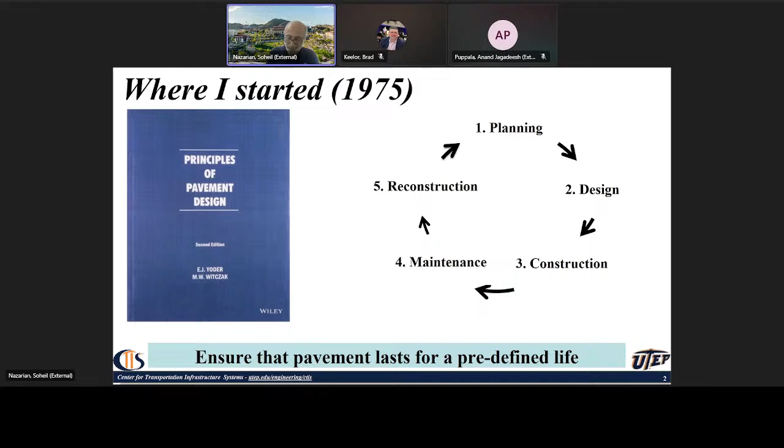In the 1970s, I started college in 1975, that's when the actual pavement design came out, the empirical ones. Since then there were revisions, and now we are lucky enough to have Pavement ME, which is quite an achievement. I guess Professor Witczak, that I started with, had a big hand in developing this.

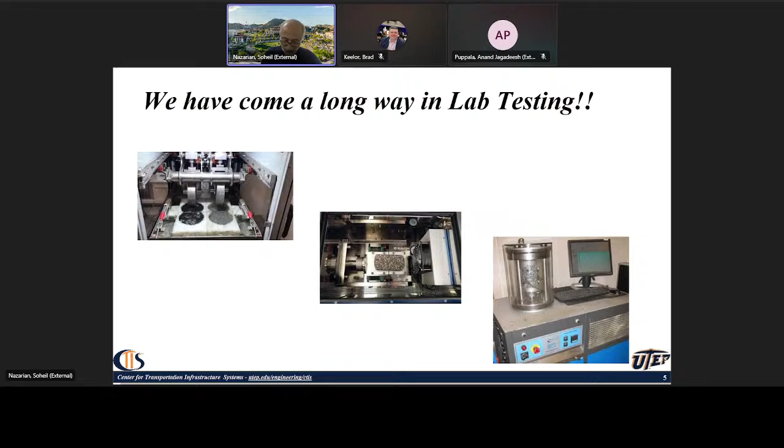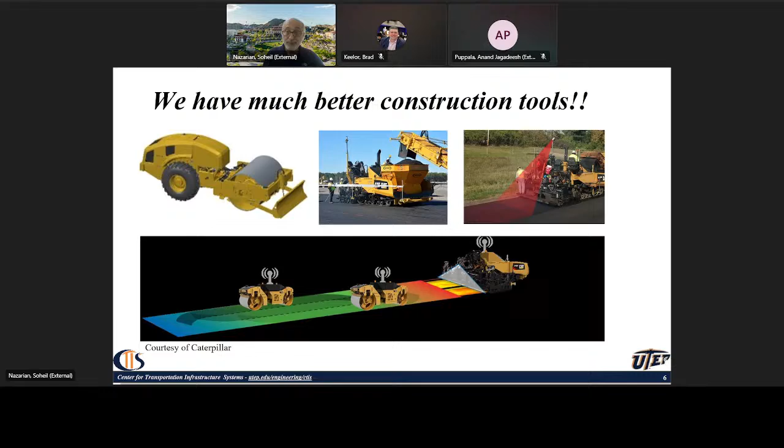In terms of lab testing, we have gone from Marshall pills and stability to a bunch of sophisticated fundamental and index tests. Construction tools have come a long, long way. Now we have all computer control, autonomous systems, and a lot of improvements to get better quality construction. And of course the last one is non-destructive testing. I'm old enough to have used the Benkelman beam. It was fun, but you don't want to do it forever.

Now we have traffic speed deflection devices that can go 60 miles an hour and collect the data for you. So everything has improved significantly.

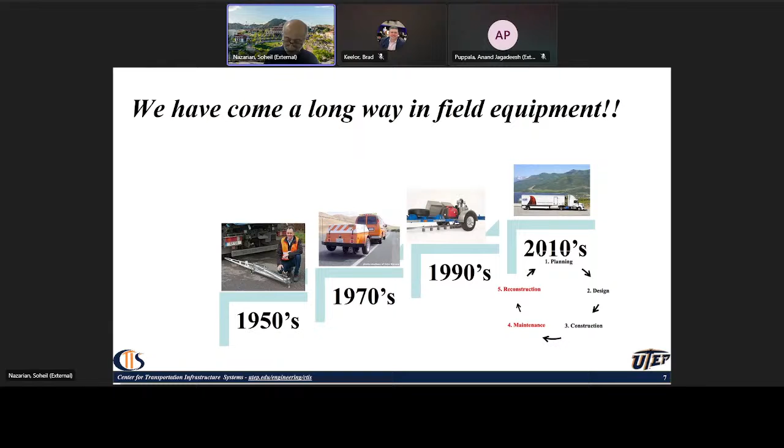But one thing that has not changed is the way we are dealing with construction, maintenance and rehabilitation. So there is a mismatch between these three areas. We design based on modulus, we construct based on density, and then we just basically look at the distress and roughness for decisions on maintenance and rehabilitation.

So let's look at the goal one more time. I just took the one that I learned from Yoder and Witczak and changed it a little bit. I want to ensure in a practical manner that the pavement lasts for a predefined life, but uniformly. So there are two items I'm going to talk about, and it's hard for the faculty, but I do. One is practicality, the other one is uniformity.

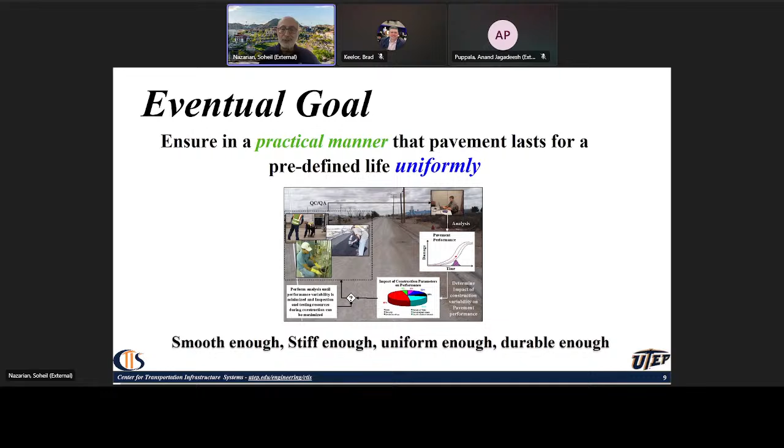So we want a smooth road, stiff enough, uniform enough, and durable. So this is the ideal steps that we can do, and then let's look at it, and we can then relax some of it.

We want to select the appropriate design algorithm. There are different levels, different sophistication of algorithm. We need to choose the right one for us.

We need to select the suitable materials for durability. I'm going to comment on that. Durability is important, but it doesn't come into the design.

We need to measure the input parameters that are compatible with the design algorithms. Sometimes we just keep using the default and not knowing the property.

We want a quality management program with target values that, you know, we can make sure that we are measuring all the parameters that are important and we are monitoring it.

Process control, we need process control to maximize uniformity. And then we need an acceptance process based on the stiffness, because we are designing based on it, stiffness.

And finally, monitoring the final product. One thing that I love to see, as a person who all his life has been doing non-destructive testing, is to have a test before you open it to traffic, because detecting changes is much easier than looking at absolute numbers and making decisions.

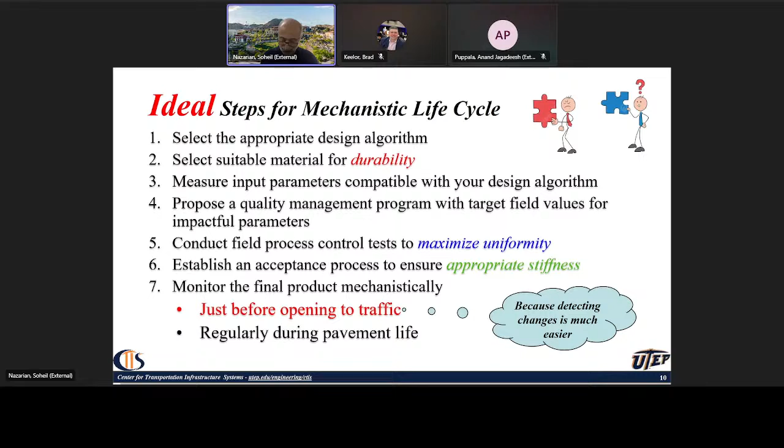So that was the ideal. I'm not naive. We have institutional issues. First of all, there's a manpower limitation. Everybody knows that issue comes up. Budget limitations, we're always dealing with that.

One thing I want to bring to your attention: if you are working for the aerospace industry, 85% of the cost is quality control. When we do highway construction, we spend less than 2% on quality control. So we don't want 85%, but maybe a little bit more than 2 would be good.

And then, of course, risk assessment. What's the risk of a failure in this time if we have a premature failure and the rehabilitation isn't working? What are the issues with that?

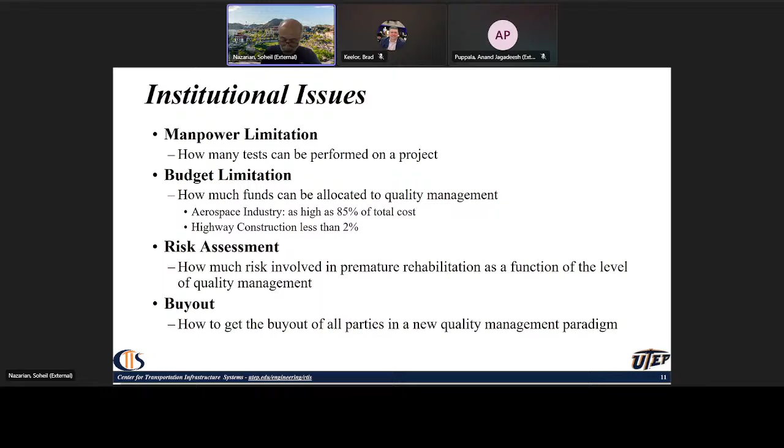And of course, we need a buy-in. We need to make sure that the owners know what we're doing, the contractors, and all the designers and people who are interested in between.

So I just scratched out the ideal and I put in a practical process, and hopefully that would work. What we're trying to do, first of all, we have to understand we want to minimize the life cycle cost, not the construction cost, as much as possible. And then there are 4 important parameters that are interrelated.

First, more important, more critical projects need more detail. Analytical modeling effort, we have to choose it again in a way that is pragmatic so that we can get the parameters that are in the model. We need laboratory testing to support the parameters that you need for the model, and we need field testing for quality control and monitoring. These have to be balanced, all four of them, to a level to achieve that life cycle cost.

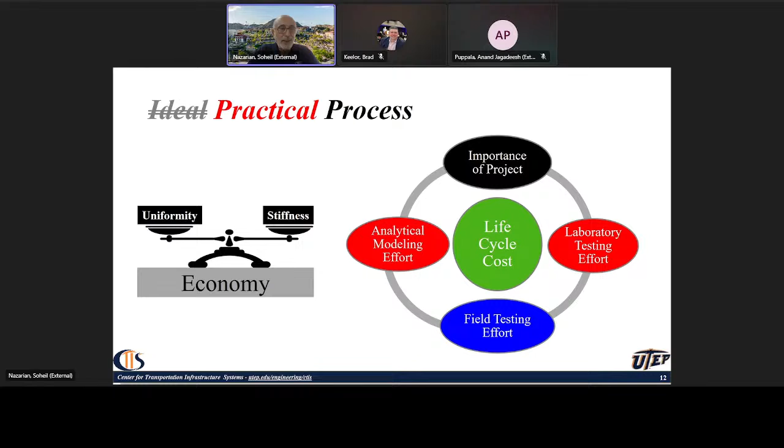So to summarize it, we have the economy as a foundation - I guess this is geotech, I can use that term - and then we are trying to balance uniformity and stiffness in a manner that gets us a durable pavement.

So these are some of the things that we have to consider. So I'd like to be positive - let's scratch the mismatch and start talking about the pathway to compatibility. These are my dreams to get there. And let's start with the design.

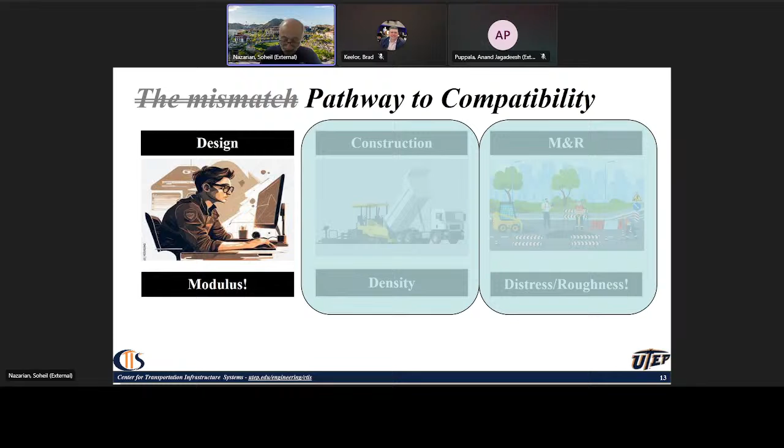So the first thing, one of the issues is that we are very loose in the definition of stress and the modulus. There are different methods, different ways, and different states that we can get the modulus, and we have to be very careful how we use it. So I'm showing you some of the parameters that are important: state of stress, temperature, moisture, frequency, and on and on. There are parameters that impact your modulus for the same material under the same condition.

Now the measurement, it can be linear elastic modulus. It can be seismic linear, which gives you the linear elastic modulus.

I like that because there is no transfer function between the field and the lab. But nevertheless, if you want a representative value, you can use something representative of truck or a falling weight deflectometer. You're going to get a different modulus, which is the slope of the blue line. And then when you go to the lab, you're going to get an even different modulus because that will be the slope of the green line. So you see that we have to be careful, and these moduli are interrelated, but we have to be careful which ones we are using.

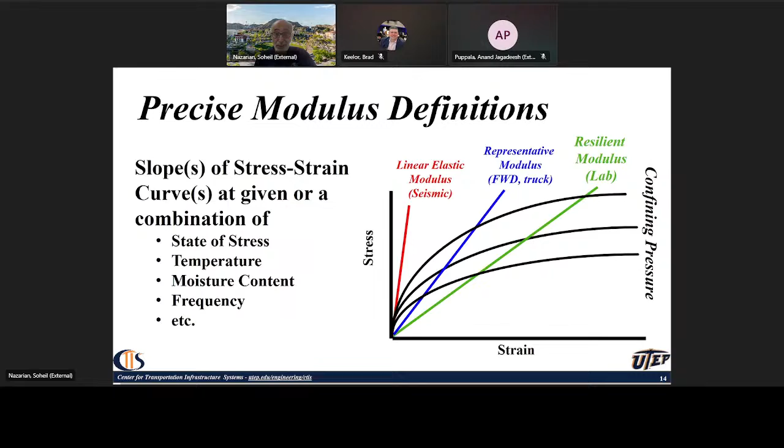I give you two examples here, one for concrete, because it's probably the easiest material to test. We normally run static modulus tests, and also seismic modulus, and there are a bunch of different mixes here. You see that the static modulus is 72% of the seismic modulus, so we can replace one with the other for that purpose.

The other one I want to show you is more difficult, for instance, granular soils. We run resilient modulus, and we can run seismic modulus before the resilient modulus. You see here, the relationship between the two is roughly 55% because of the strain and stress condition. But when I'm defining the modulus on the y-axis, for the resilient modulus, I'm identifying at what confining pressure and at what axial stress. Because if we just start mixing and matching, the data would be random. But at a given state of stress, you can relate them together.

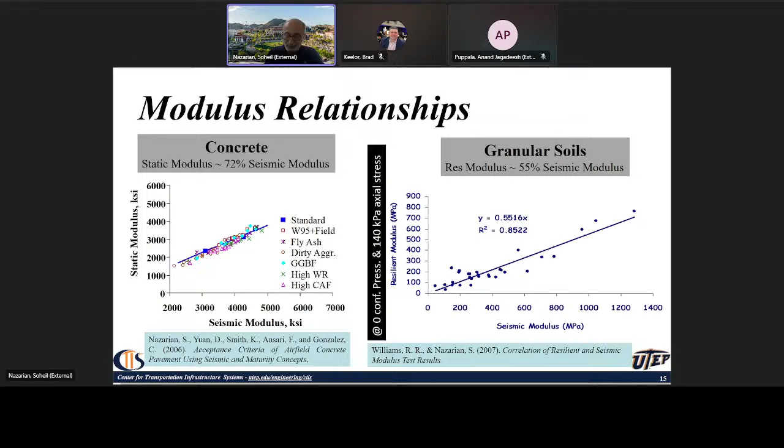So let's look at the design approaches. I would start with the most desirable to the least desirable. The most desirable is mechanistic. Then mechanistic empirical, catalog design, and then, of course, empirical.

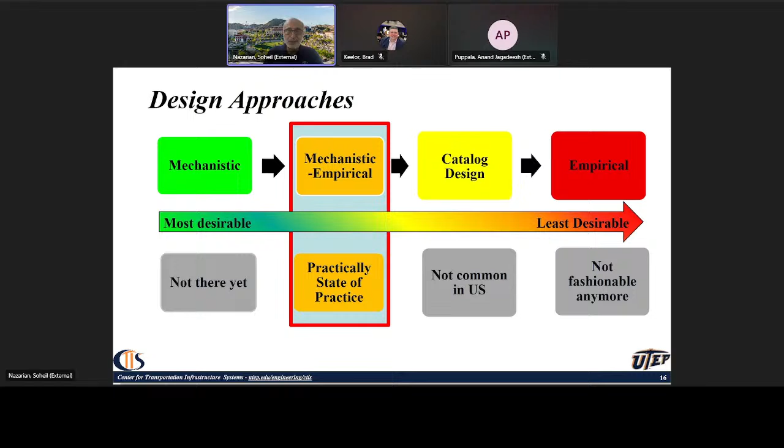Mechanistic, we are not there, and it would be a while before we get there. Mechanistic empirical is essentially the practical state of the practice now. Catalog design, we don't do much in the US. The only time we do catalog design the hard way is when we do not change the defaults on the design parameters of the program we are using. And then, of course, empirical is not very fashionable. Very few people are using it. So my focus would be on mechanistic empirical from now on.

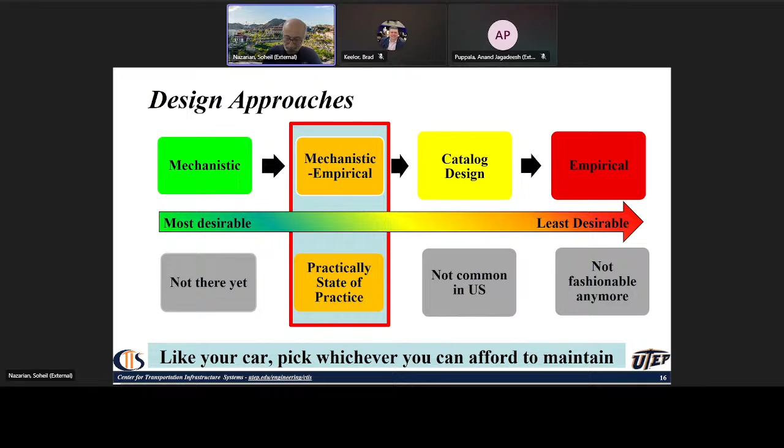So what mechanistic empirical, and how much sophistication, just depends, like the way you buy your car. You don't always go and buy a Porsche if you are not willing to change the tires every 3 months and pay $3,000. So just depending on how much you can afford to get the parameters realistically, you need to decide on that.

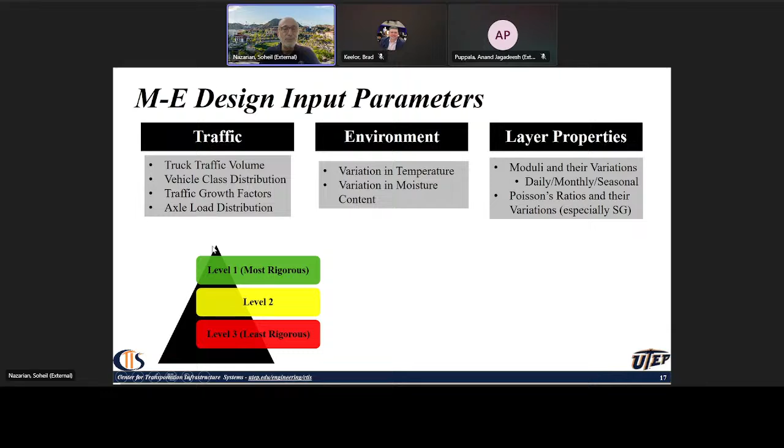So let's look at the design parameters. There are 3 general areas: traffic, environment, and layer properties. These are the 3 input parameters, and then the details around it. And then these three we can have at different levels. Usually most programs have level 1, the most rigorous, where we measure everything that we put into the program. Level 2 is somewhere intermediate, and level 3 is the least rigorous of all.

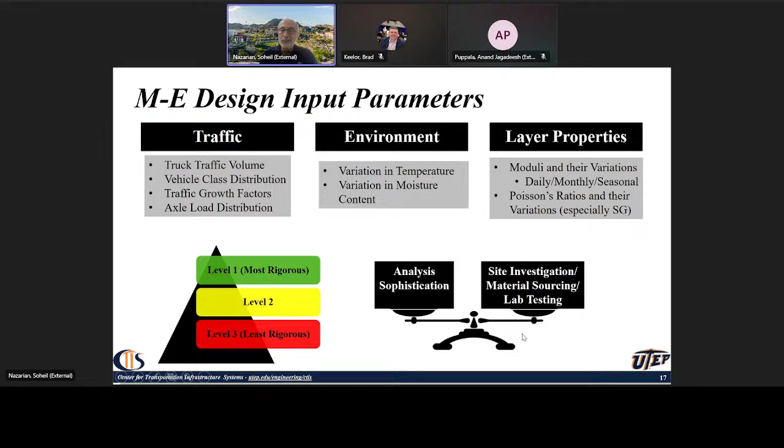Basically what I'm suggesting here is that we have a need to balance the analysis sophistication with how much we are willing to do site investigation to define the site, how easy it is to source material, not design based on a fictitious material but a material that we know, and how much lab testing we would like to do. So if you go to level 1, make sure that you measure it all.

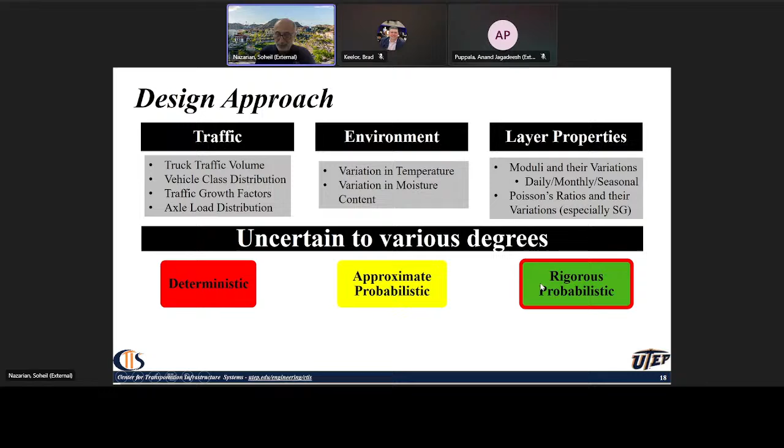The other issue that comes up is uncertainty, because material uncertainty is a significant issue that we have to deal with. Traffic is the most uncertain of all, because as they say, if you build it, they will come and build a bunch of homes and stores and factories. Environment, just by nature, is variable, and then layer properties, of course, uniformity is something we need to understand. So you can go deterministic, approximate probabilistic, or rigorous probabilistic. And if we go rigorous, then we are talking about time. I prefer that, but we have to see how we can do that.

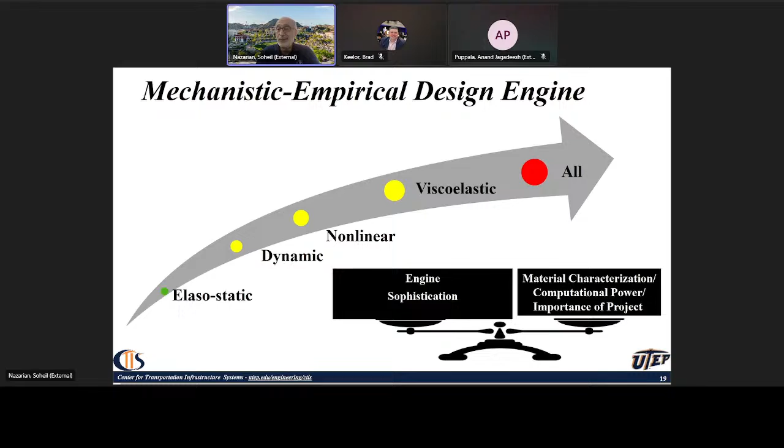I would like to talk a little bit about site investigation. This is something we have to consider, because a lot of the time the problems we have with the design is that we don't have a good grasp of the section. Traditionally, we go every tenth of a mile or every 500 feet and just drill a hole and see what we have, and then we simplify the cross section.

I think we need to shy away from that, and something I call the insurance against change orders is to basically start using some of the much simpler, rudimentary ways of looking at the variability, and drill based on what these tests tell you. Put the boreholes closer where there are anomalies. When it's uniform, just go further apart.

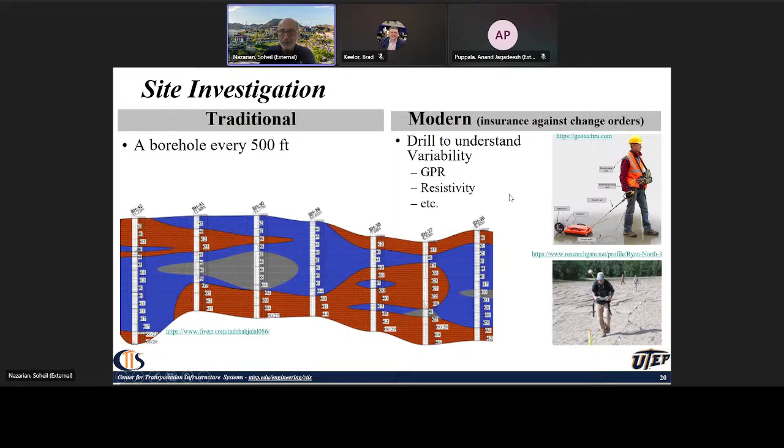Two examples: one is GPR, and you don't need sophisticated analysis, you're just looking for the anomalies. And the other one is resistivity. You see this gentleman has a string of sensors, and it just basically walks and collects the data to look at anomalies. If we do it based on that, I think we can improve the reliability of the design.

Now, I said durability. The problem is that we cannot design for durability. It's a holistic thing, something that comes with experience. For instance, we know that if there are significant layer mismatches between two adjacent layers, you have a problem.

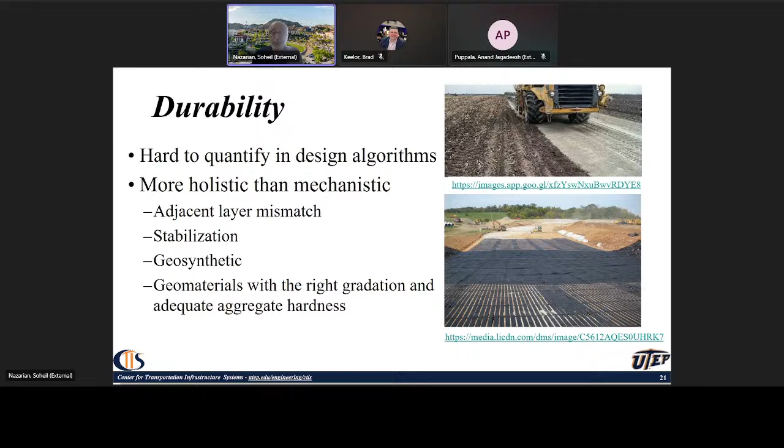Stabilization, we know that it's going to increase the life. Geosynthetics can separate and basically strengthen so that we can have a longer life. And of course, geomaterials with the right gradation and adequate hardness, that's something that affects durability. These are the holistic things we need to consider before we go to the design.

Okay, enough said about the design. Let's go to the next one and start talking about construction. Construction, we just basically do based on density. I would like to see if we can go from that to modulus, because we design for modulus. We are the only industry that doesn't check what we design for.

So instead of traditional QA/QC, I would like to talk about performance management. This is terminology I stole from John Siekmeier from Minnesota Department of Transportation. Essentially, we want to check both material quality and workmanship. I think in one of the ASCE reports, they say that 80% of the problems we have are with workmanship, 20% with material quality. If you look at the QA/QC programs we usually have, we check material quality and pay less attention to workmanship.

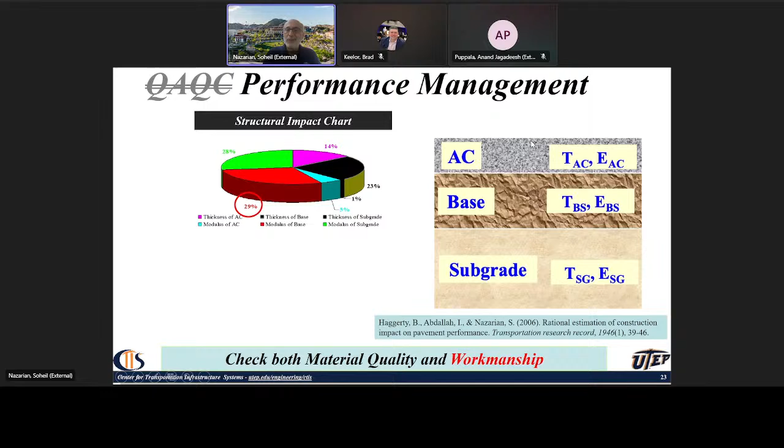So what do I mean by performance management? Let's say you have a typical flexible pavement, three layers. The first thing I want to introduce is a structural impact factor. That essentially tells you which parameter, which thickness or the modulus of which layer, is most significant for your design. If it's a thin pavement and I do the impact chart...

You see that the two parameters that are most important are the modulus of base and subgrade. Those are the foundation layers. And for geotechnical engineers, that's good. The problem is that most of the effort in quality control goes with the AC, even though it's thin, and less with the layers that would ensure durability.

The other parameter I would like to introduce is material impact. Which parameter in each one of these is impacting the performance? For instance, if you stabilize it, is it the percentage cement you have to worry about, or the stiffness or hardness, whatever it is, moisture, whatever it is, and then you do process control based on that.

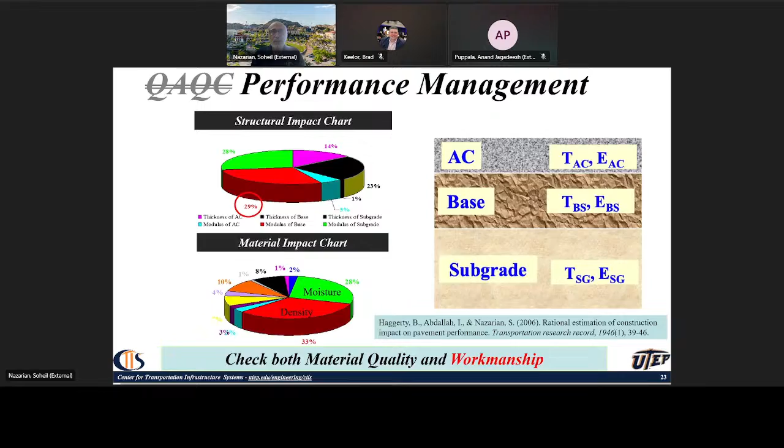So if you're doing performance management instead of QA/QC, there's a pre-construction phase, which is part of the design, and on that one you decide on the parameters that are important, the layers that are important, and the properties that are important. Then you can get the sampling rate based on the variability that you can tolerate. This is just basically part of the design, done in an intelligent manner and optimized from the beginning.

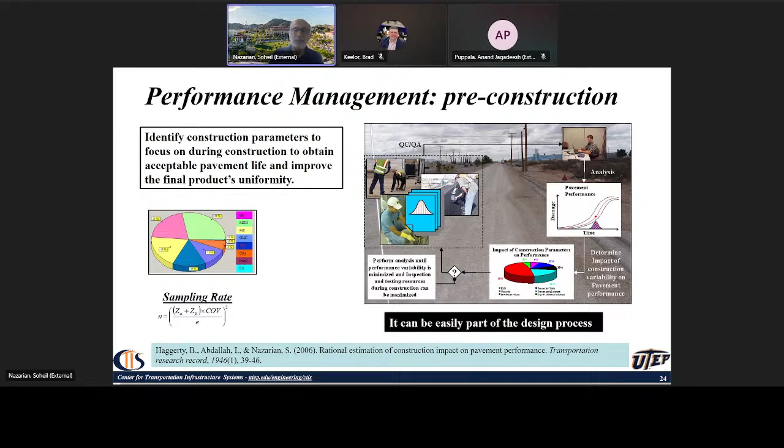I wish I had a day to talk about that. Intelligent construction technology has come a long way, where we can monitor the process in real time and learn from it to improve construction and make it more uniform. I highly encourage contractors, especially, to look into it for the competitive edge.

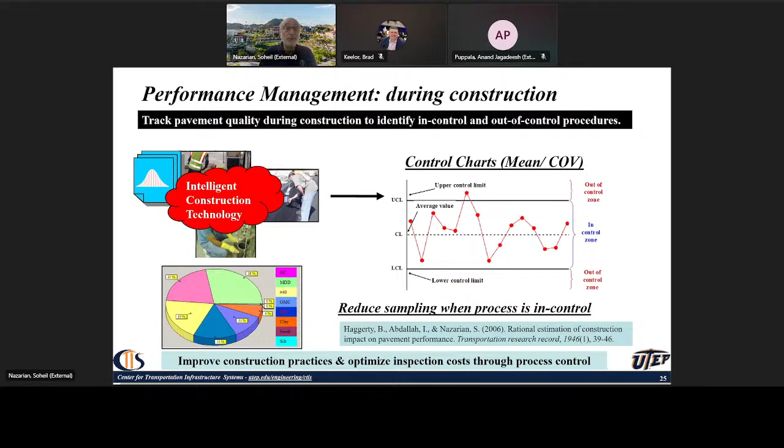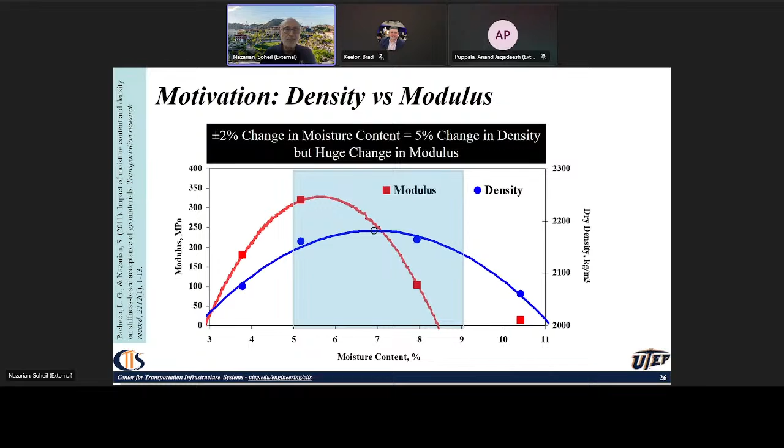Let's relate design to construction. From best to worst options: measuring modulus before structural design of all the layers; utilizing a catalog, which is very pragmatic—you have common materials or mix designs you use all the time, so maybe you can catalog it; using empirical relationships that relate index properties to moduli; and the last, worst option, presumptive design values.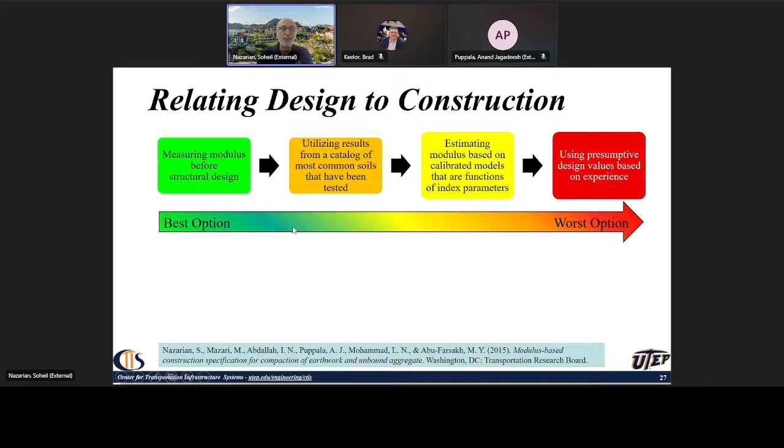I call it 'default disease'—the default values that come with the design programs, never changed based on where you are and what you have.

Targets are important. If you're measuring the modulus, you can set the target with confidence and know what you're going to get—same with using catalogs. But when estimating based on indices, you want to localize and define it for your own materials, then estimate the target using test strips. And if you're using presumptive design values, by all means go with density-based, because we don't have any basis to check against otherwise.

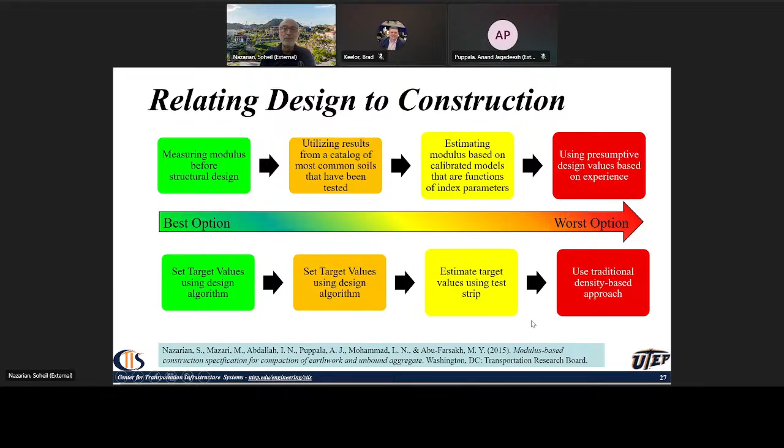What equipment? That's another question. There's NCHRP 10-84 if you want to get curious about it—we tested 6 or 7 different devices, and all of them are interrelated and work together. I'm showing you 2 examples: one is a seismic device, and the other is the lightweight deflectometers you see here. We want something layer-specific, rapid, easy to use, and affordable.

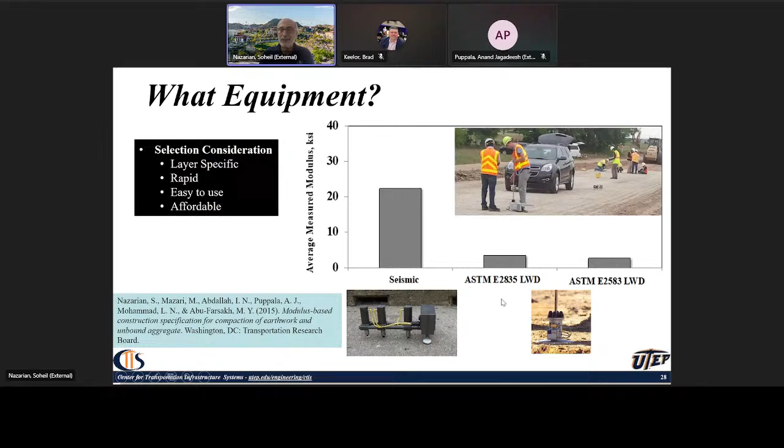These are the parameters you need to consider to see what's best for you. One caution: there are 2 ASTM standards using the same digits, so you have to be careful to specify one or the other, because there's a factor of 1.6 difference between the measurements they produce. That's something interesting to consider.

Target values, again, are very important. If you're going modulus-based and have decided on the device, you can make it part of your design. MnDOT's mechanistic-empirical approach already spits out target deflections, for instance, for the lightweight deflectometer they use, and from then on you can monitor it layer to layer. We prefer deflection over modulus, because the technician can look at the deflection—if it's lower than the level you want, you're good to go.

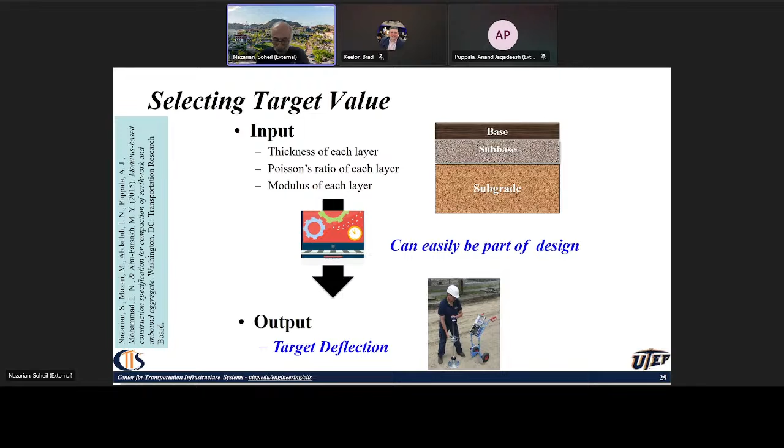So what would be the modulus-based performance management? We would love to know what material you're going to use when you're designing, not wait till you design and then see what material you want to get. Use the structural design algorithm that you love, you can afford, you can use, and get the parameters easily, and then get your target from that design algorithm.

Material properties and run lab testing as we said, and then determine the target modulus, and then perform compaction. We advocate process control and intelligent construction tools for that to get uniformities, and then do the non-destructive testing and see if you are getting the modulus and if you are uniform enough.

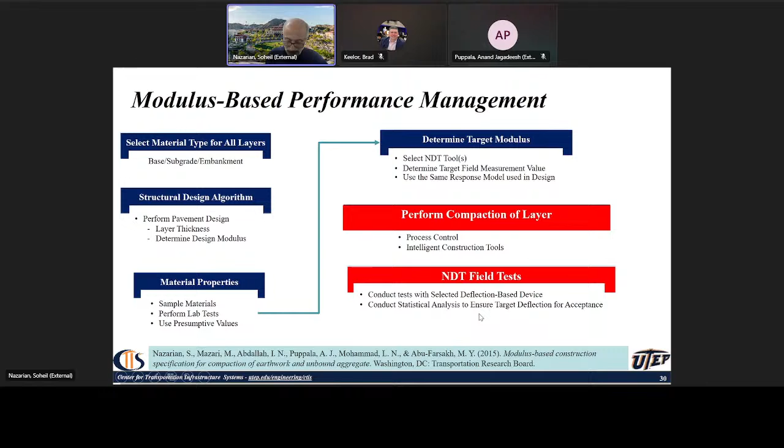What I'm showing you over here is an experiment, a project that we had with the FAA. I just want to thank Navneet Garg for including us in this project. And what you see, every circle is one project somewhere in the United States, and this is primarily based on subgrade material. And we are using the concept of the PWL to combine the uniformity and stiffness over there.

And what I'm showing you over here on the y-axis is the relative density, usually 95%. And on the other axis is the moisture content, which is the difference between the moisture content in the field and the optimal moisture content divided by optimal moisture content. I call it the poor man's degree of saturation. And the bigger the circle gets, the bigger the variability of the results that you have.

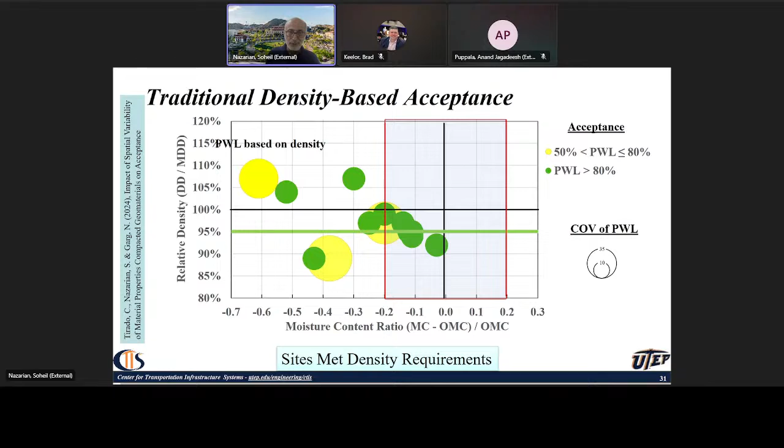What you see over here, all the green ones are the ones that passed with the PWL greater than 80. And then the other one is between 50 and 80. You just have a penalty, but it's accepted, so it's not removed. And you see essentially none of the sites there was anything to be removed. They were just all accepted. Now, there was a modulus measurement with every single one of these projects that you see.

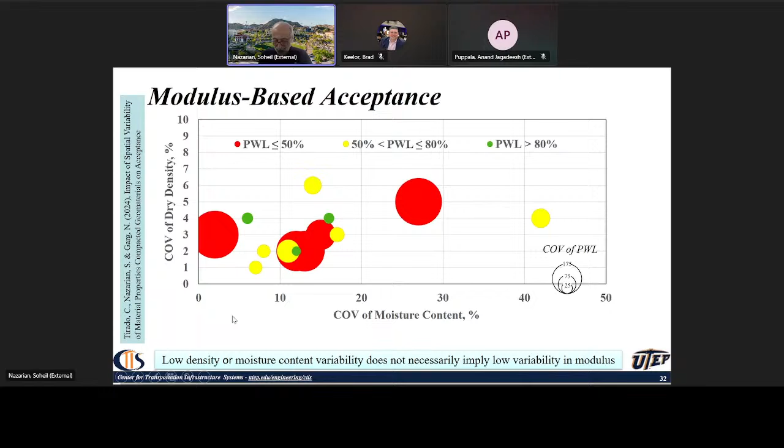Now, this one shows you the PWL, a version of that. And what we have over here is a little bit different: coefficient of variation of dry density and coefficient of variation of moisture content, and then the PWL circles that you see over there. Red now just basically means it's replaced, it's not acceptable. And you see how many red I have. And you see that the circles, if they are small, it doesn't mean that it's uniform, but it doesn't have the stiffness. So this is another indication that we have to do it.

One of the concerns that we have is that we do not test as many pairings that we want. We just have 1 or 2 tests per sublot or something like that, and to accept the material. So there's a big risk for the owner over here.

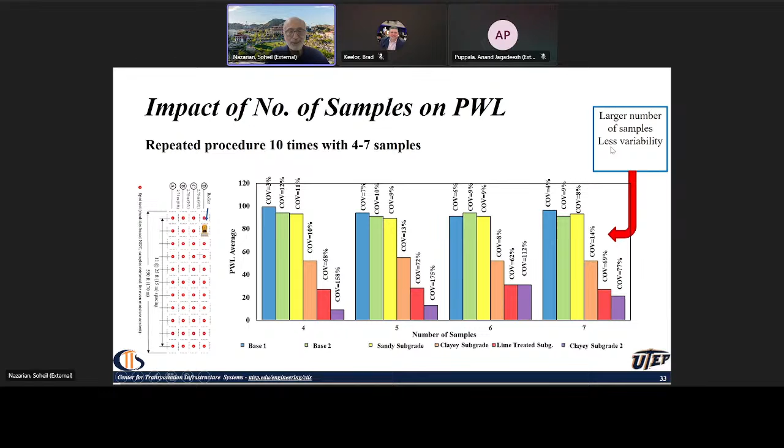And what you see, the conclusion is that the larger number of samples, the less uncertainty you have in the result. So the pragmatic one is the 7. And if the 7 is enough, why don't we extrapolate and see if we can get a lot more? And that's where I'm going to talk a little bit about intelligent compaction, because intelligent compaction is giving us a lot more data than the few that we are testing, as is shown over here.

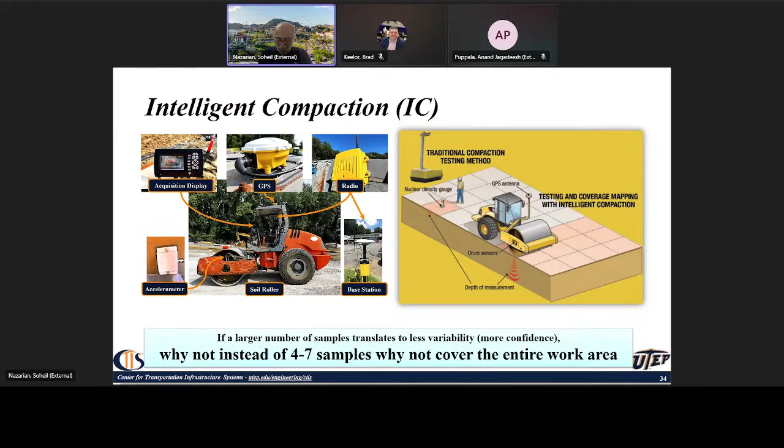So essentially, if you're not familiar with intelligent compaction, it's just a regular roller. We install an accelerometer, either 1-dimensional or 3-dimensional, on the roller to measure the vibration. There is the acquisition display, and then there is a GPS unit over there. So it's georeferenced. That vibration of the roller is the input. And based on that, we can just do some judgment on the variability of the material and the stiffness of the material.

Just to get you there, this is what FHWA put out in, I believe, 2017-18, and they defined intelligent compaction at 5 different levels. Level 1 and 2 is essentially indices, vibration indices of the roller. Level 5 and 4, they are getting sophisticated analytical combined with the experimental data to get moduli and stiffness. So level 1, 2 is very easy to do, it's implementable, and it just basically collects the data as we go along compacting, and it's very good for uniformity, it's an index. Now, if you want modulus and stiffness, then you have to go to level 4, 5, which is more involved. So let me give you a little bit of detail.

Some of the level 1, 2 parameters, for instance, Caterpillar uses CMV, Hamm uses HMV, Sakai uses CCV, and essentially they look at the vibration frequency and its multiple, and the higher the amplitude of the multiple, based on that they'll come up with an index related to stiffness. It's relative, but it works well, so it would be good for uniformity.

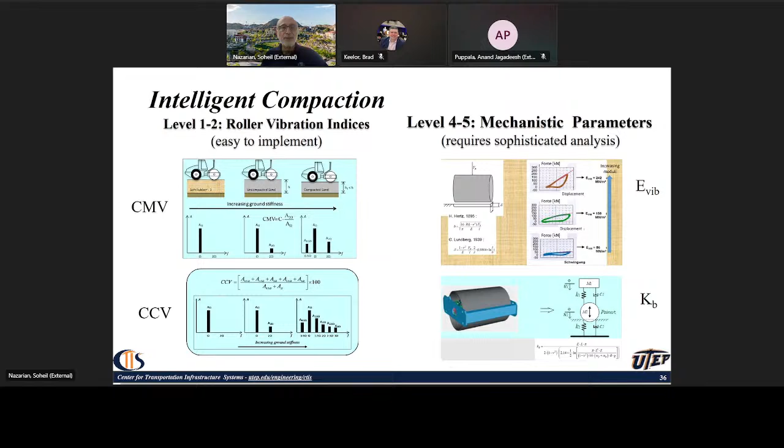So let's take the low-hanging fruit, and that's level 1, 2 for uniformity and pass count. Pass count, the process control uniformity, is a parameter that we're trying to understand at this moment. We don't know how uniform we are, and we want to get a handle over it and how we can improve it in real time during construction.

So this is a case study that we did. We talked with a bunch of contractors, a bunch of DOTs, and people who were interested, and we heard about the concerns that they had, and we came up with this scheme you see over here.

And the concept is that as you roll, you're collecting data, but we came up with the concept of sublot instead of just doing kriging, a more sophisticated approach. Because this is transparent, it only gets the numbers that come from the machine. Anybody can do their own statistics and get the same number, so there's no discrepancies, and it doesn't get into referee and delay of the project.

Essentially what we do, we assume that the sublots are the width of the roller, and the length is whatever you want. We use 25 feet, but you should use something you'd be comfortable asking to be reworked if it's not uniform or stiff. In this case, we use 25.

And this is what you see, the color coded map. They're not fancy mesh colors, just basically yellow, red, green. From the days I worked with the Corps of Engineers, I learned that.

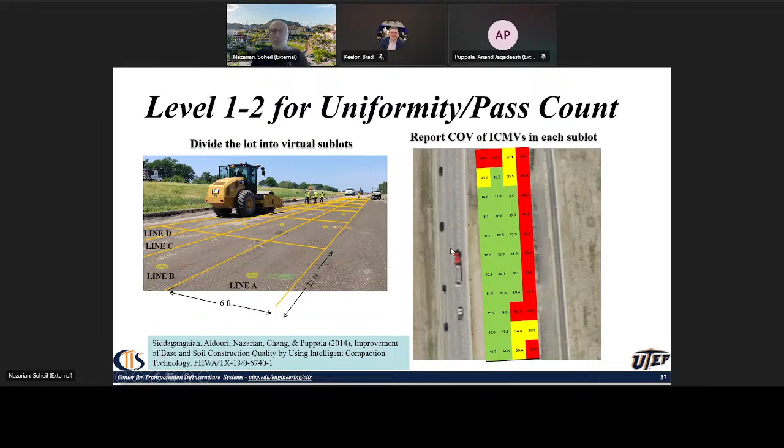Now, that's what we can do for this. Now, if you want to go to level 4, 5 and estimate modulus and stiffness, that's available too. But this one, like anything you're back calculating or doing the inverse problem to get the stiffness, needs a forward model. And the forward model is essentially modeling the roller on top of the soil, 1, 2, or 3 layers, whatever you want, and getting the responses of the roller to do it.

Very time consuming and not practical. So how do we make it practical? We just started looking at artificial intelligence and machine learning.

So we are lucky enough to have access to a supercomputer, and for a couple of years we let it run, and we have tens of thousands of cases with different material properties, different nonlinearity, different structure. Based on that, you can generate a neural network to get an instantaneous response estimate of the value.

And this is what you see, the results of the finite element versus the model that we use. Some of them take like an hour on the supercomputer to run, compared to what we instantaneously predict with the neural network. I think it's good enough given the variability that we have in the system. Now we can get every single data point in real time and turn it into the modulus.

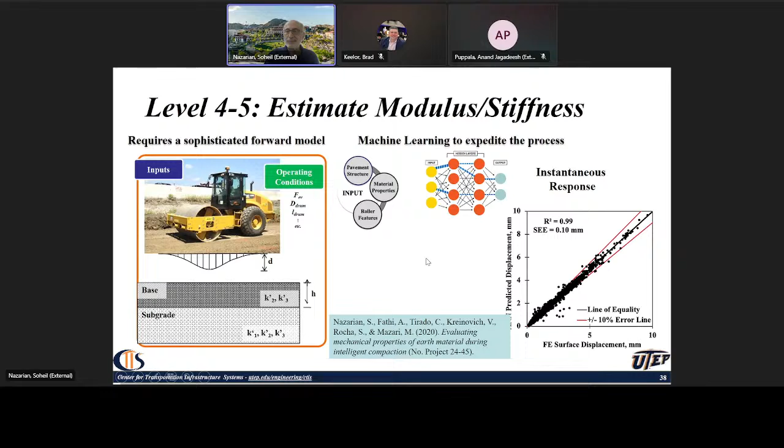One thing we caution you: the model is never perfect. You always need to go to the field and do some local calibration. This is what we're suggesting for local calibration. Just basically go and roll.

Now what we would do is get not the coefficient of variation, but the average of the values that we have from each one of these sublots.

And we basically report it over here. If it's 75% of average and above, it's green. If it's between 50 and 75, it goes yellow, and when it's less than that, it gets red. So you have to be substantially soft.

And basically what we do is just look at it. If it's soft, maybe we can work out this area and improve it on the right. The rest of it is looking fine, but you need to calibrate it.

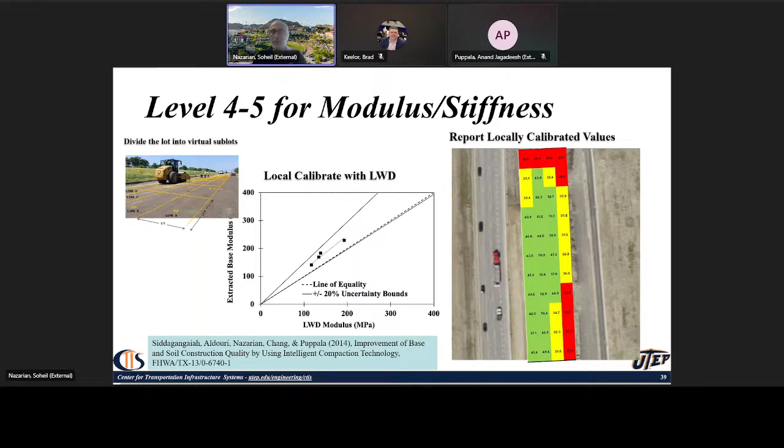After you get this chart, we go to the few places with low, few places with high, and some in between, and run the lightweight deflectometer. We convert all the numbers with the calibration that you get to the lightweight deflectometer modulus, so that now you have a calibrated value for the modulus.

This is the results of all this, some of the sites that we have done so far. The good news is that on average we are doing a good job of predicting the results. The bad news is the error bars that you see over here, that's the standard deviation of the variability we get with the different devices.

You see that the intelligent compaction gives you less uncertainty because we have thousands and thousands of data points we average, as opposed to LWD that is limited.

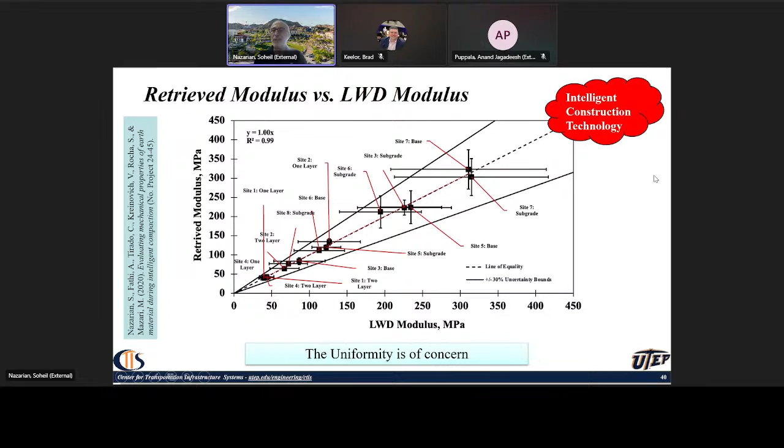So when you look at this one, the uniformity is of concern. We need to reduce this uniformity, and one way of doing it, again I'm pushing it, I don't talk about it because we don't have time, is intelligent construction technology. There are a lot of nice tools we can use.

Let me go ahead and get to the consequences of not doing modulus and going to density instead. This is a case study that I love, because the contractors were very conscientious, very helpful, and the quality of the final product was extremely good. The sites were accepted for density, and honestly, it looked very, very nice.

So what the design was in the foundation was 12 inches of base over 12 inches of lime-treated subgrade. These are the design values that they used. The designer used 10 KSI for the lime-treated material and 50 KSI for the base.

Right off the bat, if I run the lightweight deflectometer, you see that most places I'm not even close to 10 KSI.

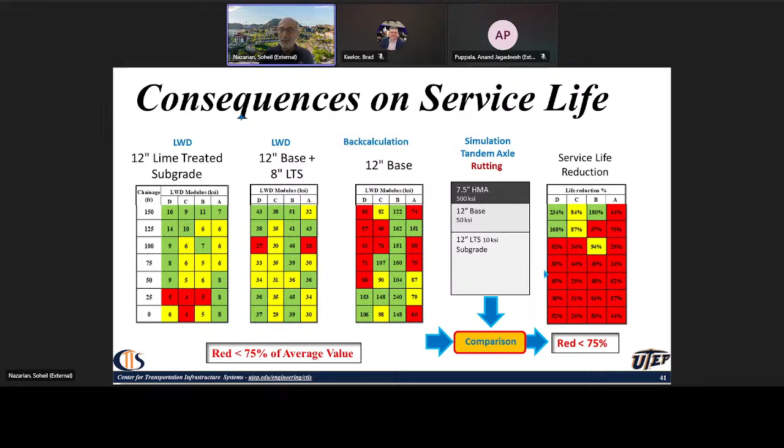This is using the MEPDG, calculating the difference between what they designed and what you actually get. You see that there are some areas where you're 50, 60, 70% underestimating the rutting of the section because of that issue. It's nobody's fault, it's just that we don't compare to see where we are.

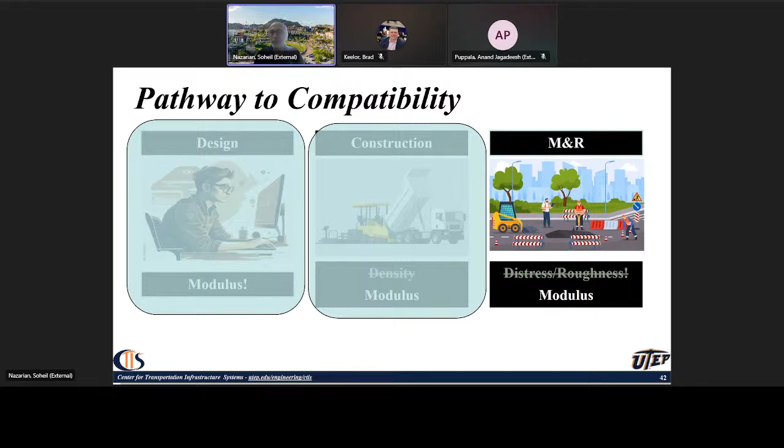So let's go to the last one, and that's the compatibility with maintenance and rehabilitation. We want to bring the modulus somehow into the equation. So what we do right now is functional monitoring.

Everybody is familiar with the automated vans for survey. These are amazingly good, and they are getting better and better—LiDAR, a lot more sensors, and they give you a lot of information about the functionality. Or you can do it the old-fashioned way: start looking at the cracks and so on and so forth, and measure it.

The problem is that when you see the cracks, it's too late. If it's manifest at the surface, maybe it's past the time that is optimal to maintain, and so it's just not desirable. So if you want to get them mechanistically, we have two tools that we use.

The falling weight deflectometer has been well understood for the last 40 years, but the problem is that it's a spot test and it's slow, so we cannot get a lot of data. In the last 10 years, traffic speed deflection devices have been coming. There are three of them now on the market, and they can collect 200 to 400 miles of data in one day. They're under intense study right now.

In the United States and all over the world, researchers are trying to do applications and incorporate it into pavement design and analysis. With these, we are hoping to find the source of the problem before it manifests at the surface and repair it. If you do a good job of construction, we're going to worry about this less, but nevertheless, things happen, and this is a good way of finding it.

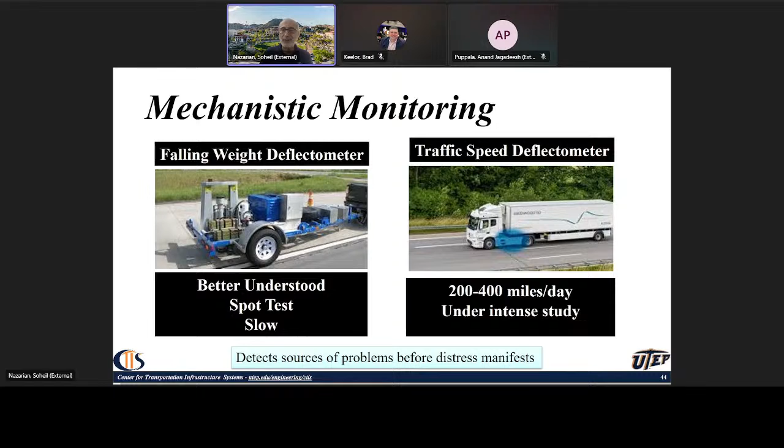So what does it do? Basically you see the two tires, and the red dots you see over here are basically a bunch of laser vibrometers. The one in the United States now measures at 11 points. This is the raw data. There's some variability in the data, but nevertheless, you measure every 5 centimeters.

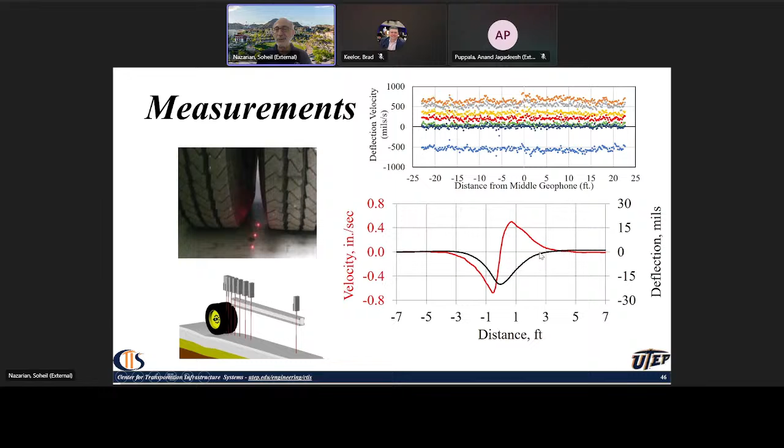What you measure is the red one, which is the velocity, and what you want is the black one, which is the deflection with distance. So there are ways of including it.

One of the best uses and low-hanging fruit is like intelligent compaction. The first one is just basically segmentation, so that you can go and see why you have an anomalous response in terms of the strength and structural condition. There are a bunch of indices and indicators coming that are a surrogate for the rigorous analysis, and you can just basically look at those and see what's happening.

At the project level, there are some pushes to start doing what we do with the falling weight deflectometer, get the moduli, do back calculation, and get remaining life. And of course, for the rigid pavements, it has recently been retrofitted for load transfer efficiency.

So what do we get from this device is something that looks like that. There are 3 negative numbers you see over here; these are the 3 sensors behind the wheel. Then we have 7 or 8 that you see over here in front of the wheel. These are negative because it's behind, and these are positive.

The error bar shows you the coefficient of variation, and you see that some of them are very low and some of them are high, depending on detectability. And what we want to do is go from here to this curve that you see over here.

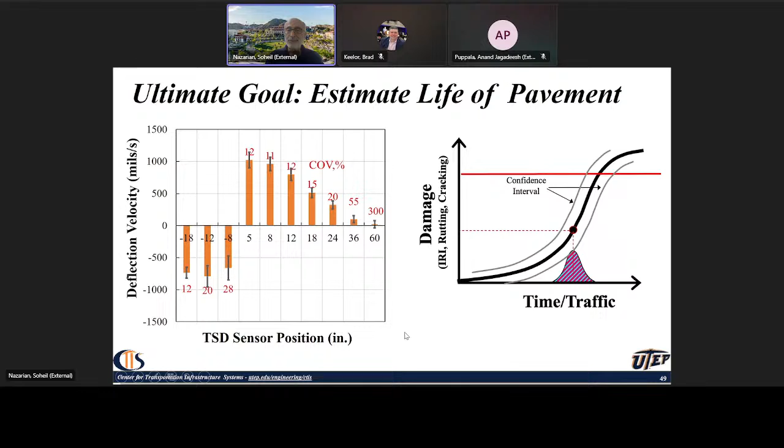And of course, there's variability in the data, and variability in the site and equipment, so we want to go probabilistic for this purpose. We need an analysis algorithm to go from the raw data I showed you to this, and there are a bunch of parameters to consider.

You can make the model sophisticated, as we discussed before, having a tire interacting with the pavement and going at whatever speed you want. We have to consider the purpose of the analysis, so get one of those four-tier analyses. If it's only the network level, maybe the first level is good.

At the project level, maybe not. Quality of data is important, and that's why, until we figure out the variability of the site and the variability of the machine, probabilistic analysis is needed. The two things that matter most to the end user are the timeliness of the response and the accuracy of prediction.

Keep in mind, you are collecting 400 miles of data, 200 miles of data at 5 centimeter intervals, so there's a lot of data management. So what I would like to suggest, these are some of the thoughts that we had about this.

Again, what I have is damage on the y-axis and time or traffic on the x-axis. What we do is monitor the functional condition and try to predict what would be the survival curve when it becomes terminal. And then there is, before that, an optimal point. Or we can go and do solely structural.

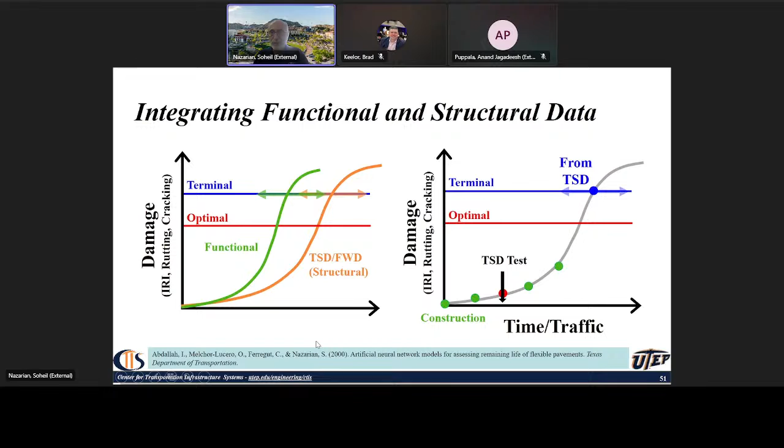So what we were suggesting is a dynamic calibration of the responses. We always know at the beginning, let's assume it was defect-free, and at the time I'm running the test, I know how much damage there is. Is there any way we can combine the functional and structural condition together to get a more accurate representation of the pavement?

I'll show you an example. This is under accelerated pavement testing, and the open symbols are basically the percent cracking of the site we were testing. What you see is I'm getting the FWD data at 20,000 repetitions of the load. There is no damage over there, so if I want to do the functional analysis, essentially this pavement would last forever.

Looking at the trend and then trying to forecast what's going to happen - if I do it based on the structural number I get, I would get the black line you see, assuming it's going to be zero at this point and reach some accepted value. But if I combine them together - I have at least 1, 2, 3, 4, 5 measurements - and consider those in the prediction, you would get the green line that predicts the damage.

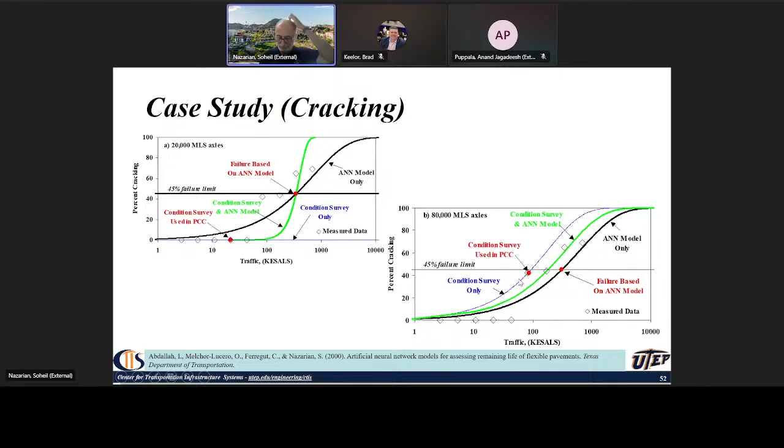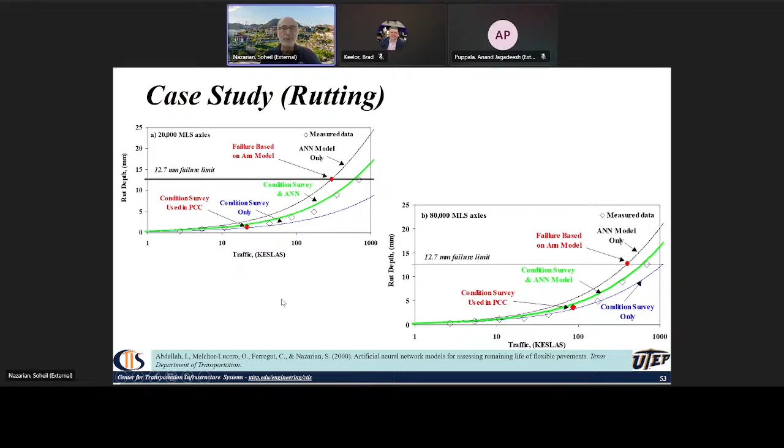Now if I go to 80,000 - it's too late anyway, but we can do the same thing. The rutting is a little bit better; we started rutting, and of course rutting happens faster at the beginning, at 20,000. If I go only based on structural, this is the prediction. If I go only on the damage, it's this one. If you do a dynamic calibration combining all of them, this is the curve you get. At 80,000, the same thing - the green one is what you get. So it's more realistic. It's not perfect, but it's more realistic than doing one or the other.

So it's been a long-winded discussion, let me wrap it up. I just want to say that we have come a long way - we've improved a lot, at least since the 70s when I started my civil engineering career. But still, there is a long way to go.

Again, we have a problem that we don't know what we are building, and we don't know how much is the variability. Hopefully we can learn and improve our methods by combining design, construction, and monitoring under the auspices of modulus, remembering that life cycle cost is important, not construction cost. To do that, we need to balance the four parameters I have: importance of the project, analytical model used, field testing, and laboratory testing.

Okay, with that I would just have to thank a bunch of people, because this is 40 years of career, and that didn't happen in isolation. I just first want to thank my wife and my children for putting up with me all these years, and letting me do what I'm doing.